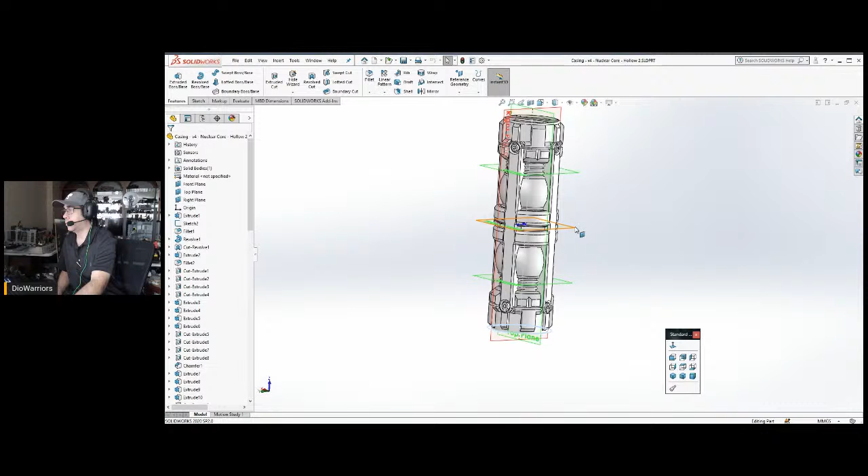There's a few other things that I am... it's been a very hectic 2 months or so since JoeFest, since coming back from JoeFest. It's been extremely hectic over here. And I'll explain a bit of some of the delays and things.

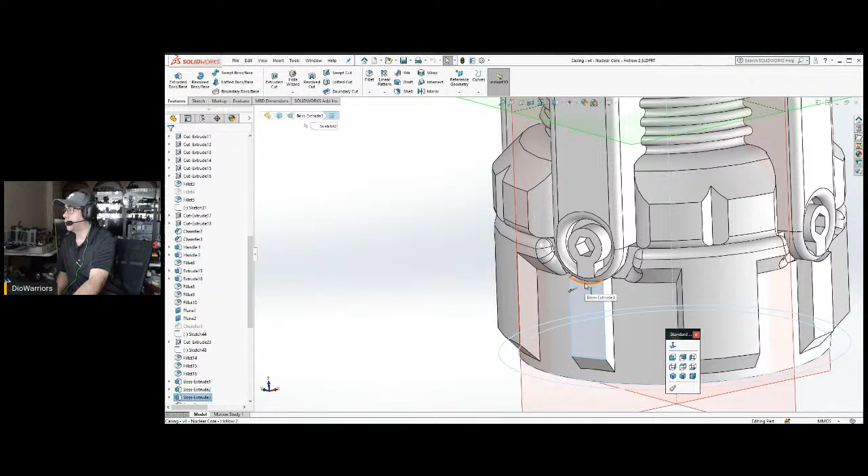So this is what I'm thinking of doing. This I'm going to make into 90 degrees. This I'm going to leave alone. This I am thinking of — I could leave it as an arc, but this I'm thinking of making more separated, you could say, maybe with a bevel.

This I'm going to eliminate the hexagon hole there because it doesn't show up on the print. I'm going to eliminate this screw part here, eliminate this gap that's in between the support structure piece, eliminate the bevel here, and basically from this point, make this into a little bump. The details of a raised screw won't show up, but it'll show up as a bump.

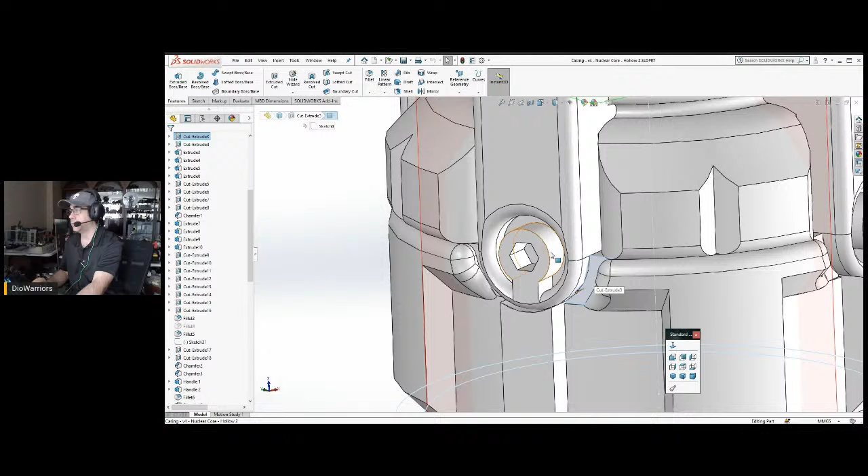Playing with the imagination, you see a surface like that and your mind is going to think, oh, little screws or something like that. What's going on is that the printer is printing this area, but there are so many raised parts and extruded cuts, little gaps, that it's rough. It plays on your imagination that there is some sort of detail there, but if you don't look at it straight on, like with a magnifying glass, mentally you see it and know there's something there. Now the details didn't really come out — just too much of a challenge for the printer.

So I'm going to help the printer by, instead of doing a lot of these cuts, making it one single bump. The concern about the smoothing process is this: these details here actually came out. I'm amazed, I wasn't expecting them to come out as well as they did. So with the resin printer and the FDM, this section actually came out.

Is it raining? It's raining outside, wow. I kept hearing this noise — with the headphones I'm thinking it's the noise from the fan or maybe one of the printers, since they have fans as well, and sometimes the fans turn on and off by themselves. But no, it's rain. Just got a message here — I'm going to take a quick look, because it might be one of you guys watching asking a question.

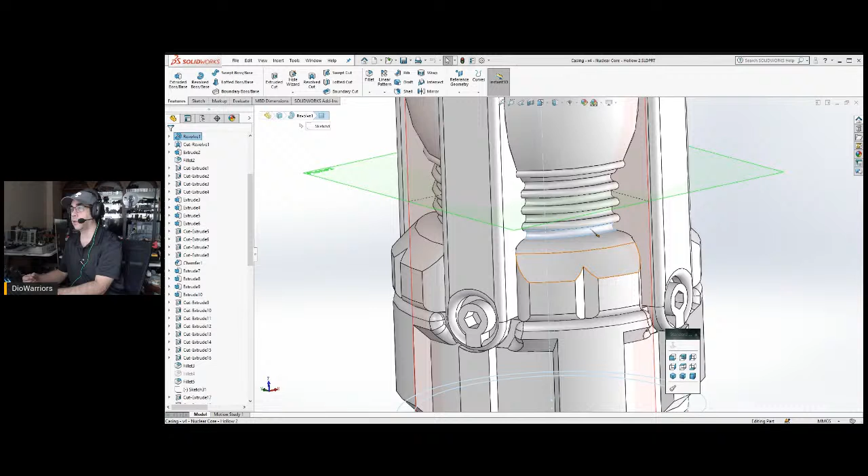Now these little dips here actually came out, but didn't come out very strongly. What I can do is either remove it or remove the bevels, making this more like a cut. I'm thinking making it more like a cut would show up that there's two parts. That definitely will — I have no doubt on that.

Yesterday, in the previous video, the concern was also this area because of the overhangs. I'm thinking what I can do is remove this middle piece, because the print does print something — it's not completely clean, but without a doubt there is something there. I would help the design by removing it and making this more of a gap. The gap definitely will show up, and it would actually look good. It actually does look good on this piece that I'm looking at.

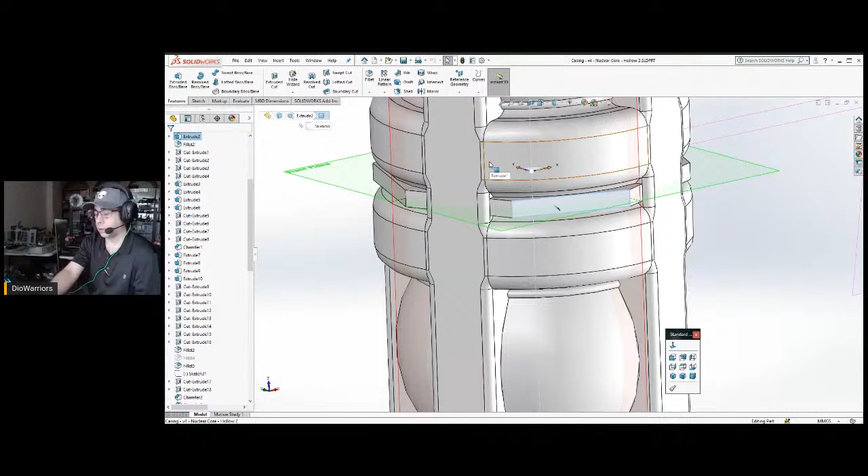So instead of just putting something at the ends, you could just rest it on top, which is also a good idea. A little bit more on the sci-fi part, making something suspended in a different way.

So okay, let us begin. Am I in the proper folder for it? I am not. I am going to go ahead and file, save as. I'm going to make a separate file. Let me go ahead and copy this path. I'm going to say 2A.

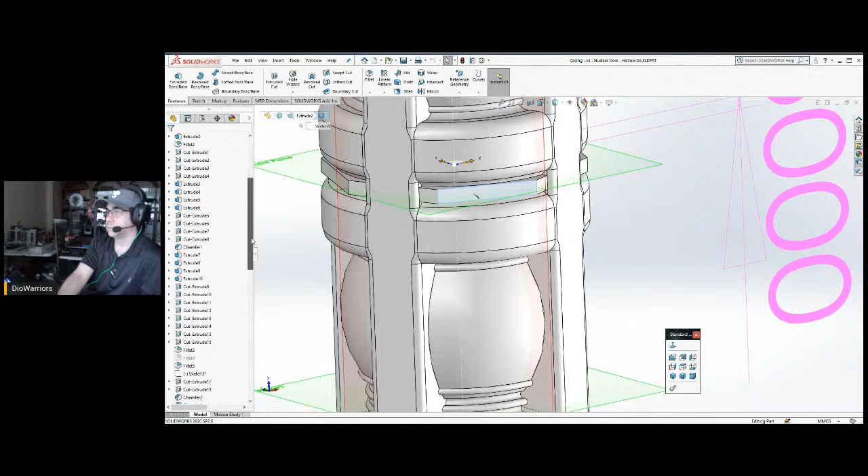That way, these changes are going to be significant enough that if I want to go back and fix them or do something else, I have the master file that I can revert to. Okay, so there's no errors listed on the top, so we shall begin.

Can I simply, with this one, simply select the shape and delete it? What exactly is this shape? All it is, is a hexagon.

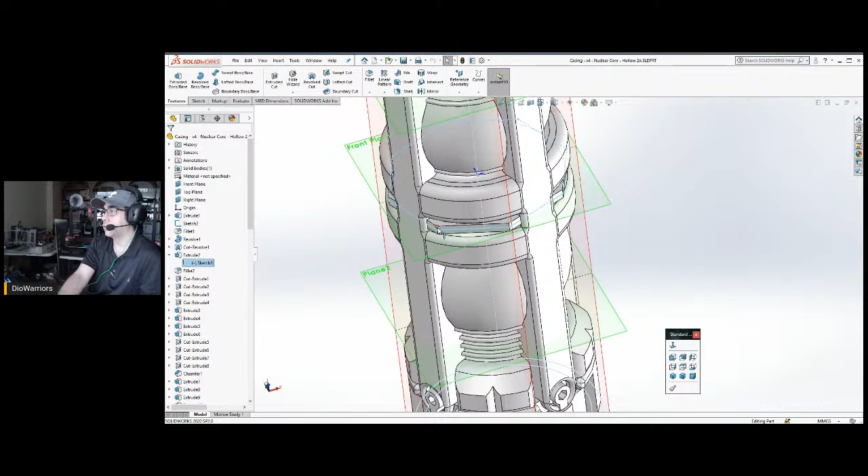Another option would be to simply make this shape smaller, give it a smaller diameter. That way it's still there, just smaller, so it doesn't really show up. Let me try that real fast.

Okay, so I'm going to click Edit Sketch. Working from here, what do we want to do? Do we want to just change the diameter size? Let me just go directly, say 3 millimeters. That would make the thing basically disappear.

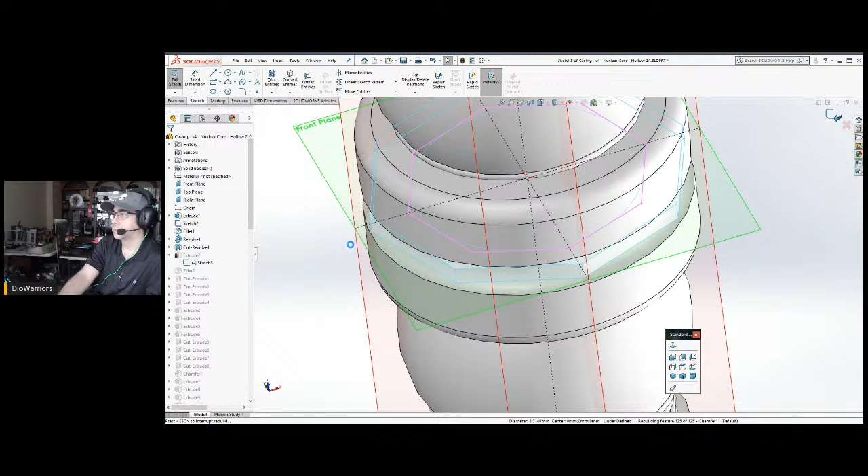Let's try this, let's see if there's no chain reaction. There might be, yeah, look at that, a bunch of errors there. Are these significant errors? I mean, yeah, well, there's quite a bit.

So let's undo this and simply delete it. Control Z. One Control Z should have done it. I'm going to go ahead and just reload the file. Oh okay, we're back.

Okay, so let's take this then and delete it. Yes, it will come up with errors, but the errors may be less. It might be even easier to fix. Sometimes it's harder to fix an error when parts are linked to it, the same kind of errors.

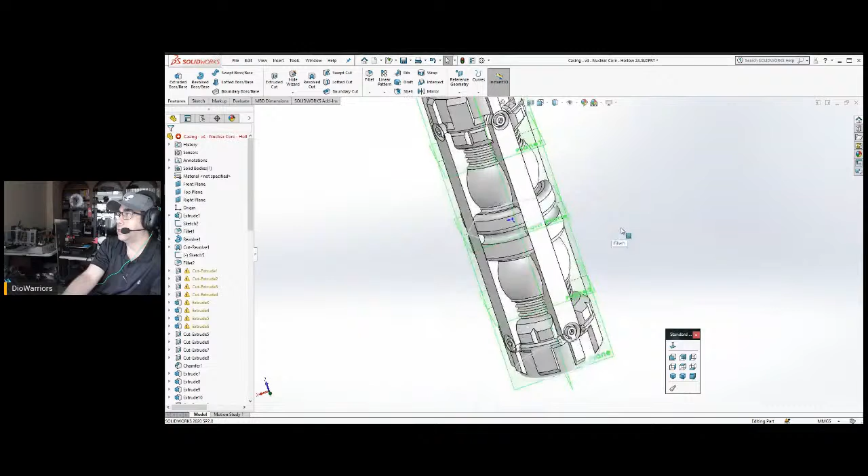Okay, well let's take a look and see. Could not find face or plane. That's a lot of stuff. Well okay, see, I don't want to spend too much time going back and fixing. So let's Control Z again.

Let's do this, not the best way to do it, but let's go ahead and just simply put another part on top of it and delete it that way by cutting it away. Okay, so this is what I'll do.

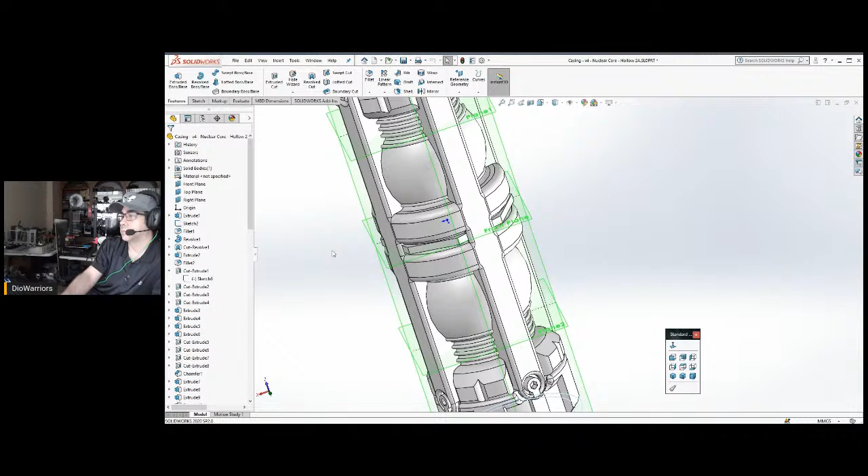I'll select this plane right there. I'm going to go sketch. Now I'm going to select that surface there. Let's do a cutaway.

Let's cut this away so we can see. Come on, cut away. Come on, I want the cuts finer. See, this is a bit not fine enough. I need to, how do I do this?

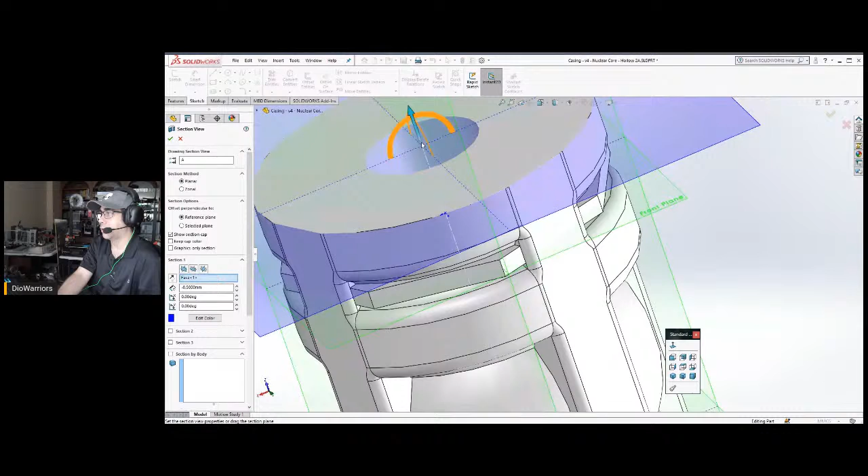Offset distance. 0.2, I never messed around with this before. 0.5, let's try that, I never did this before. Never did that. Can I simply drag this here? Well, still want to do 0.25. 1 point. Yeah, so this is doing what exactly? Positive there, negative.

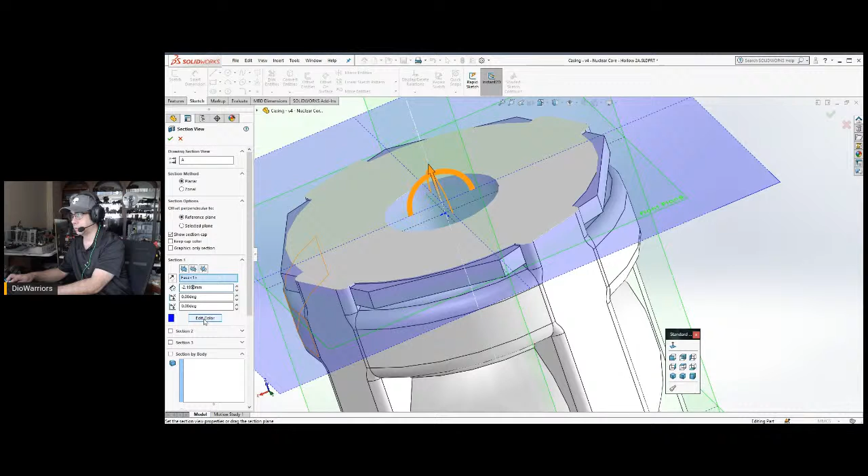Okay, much... that more. A little bit more, getting closer to the 2 mark. Oh okay, let's just leave it like that.

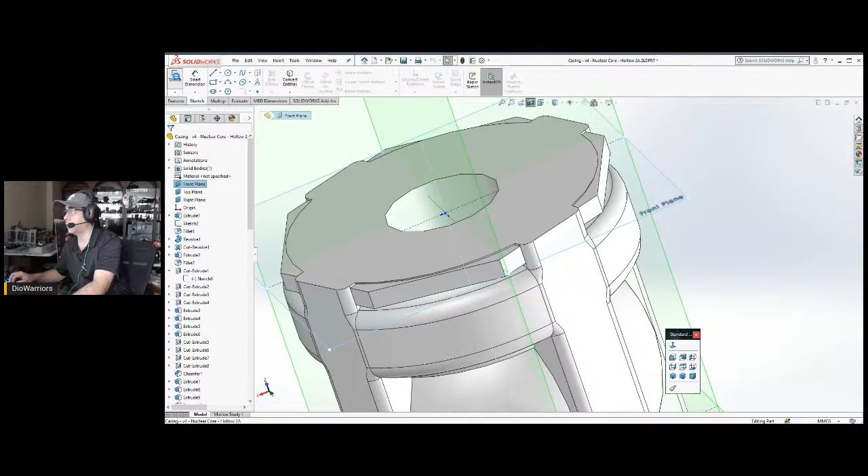Okay, so what I want is to expose this area so I could go. I already went sketch. Maybe I didn't select the second sketch. Okay, so this, I need to change the orientation.

What I'm going to do is make an outline here. There. Okay, up. Delete. Here, here.

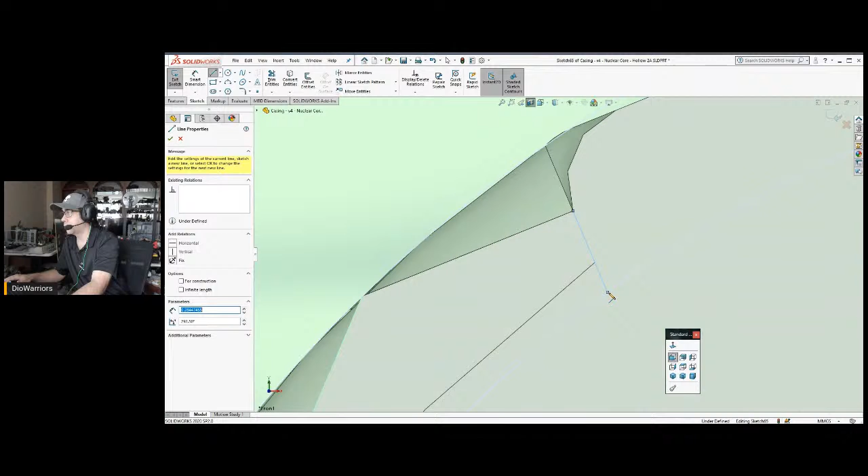I guess there, because remember I didn't really cut away in that view all the way down to the surface. I just got really close.

Let's do this, go center line. Find the center line from this thing. Where is it? Where is it? Where is it? There it is. Okay, center line, let's go put here. So what I want to do is select those two and say mirror about this line here. Okay, now I have it down there.

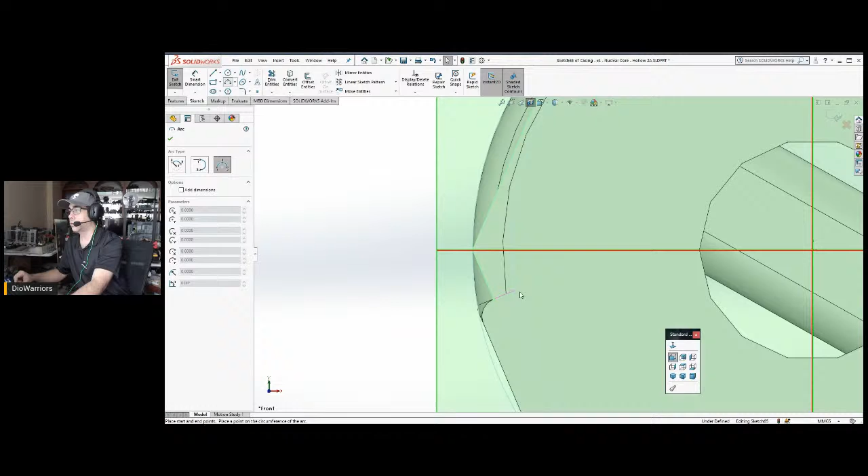I say good, now let's do an arch, or an arc. I keep saying arch instead of arc. Okay, it looks to be like the underlying circle that's underneath it. Now I'm going to select this. Rotate, no not rotate, sorry. Now I'm going to select this.

I'm going to say circular sketch. 1, 2, 3, 4, 5. Okay, 4, so total of 5. I don't have to do anything. I just select it, say OK.

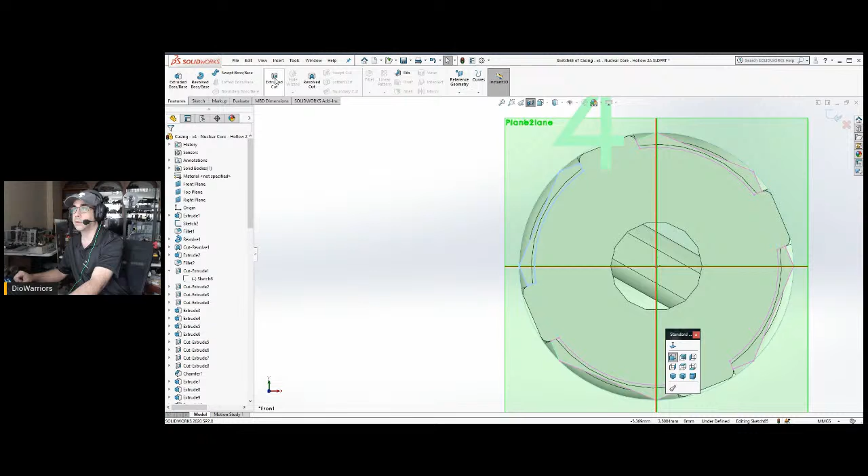Then I could go features, extruded cut. I just want to go from up to the surface. I want to do the cut to that surface. And on the other side, direction 2, up to the surface here.

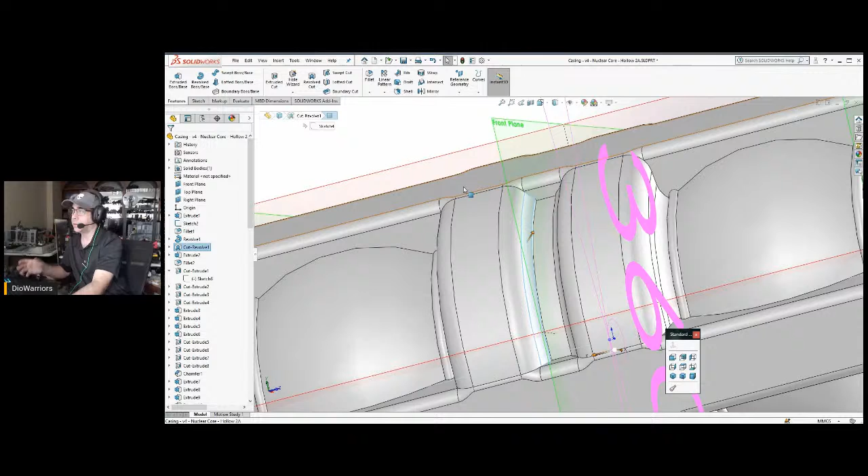Now there's a little piece there I'm not going to worry about so much at the moment. Let's remove this. And because what I want to do here, this might generate an error because maybe I should have done this part first, but because we were doing, well, let's see.

Oh, it's a Revolve Cut. Ah, look at that. Okay, where's the master shape? It's right there. Huh, I can probably make this a little bit bigger. Let's see. Sketch.

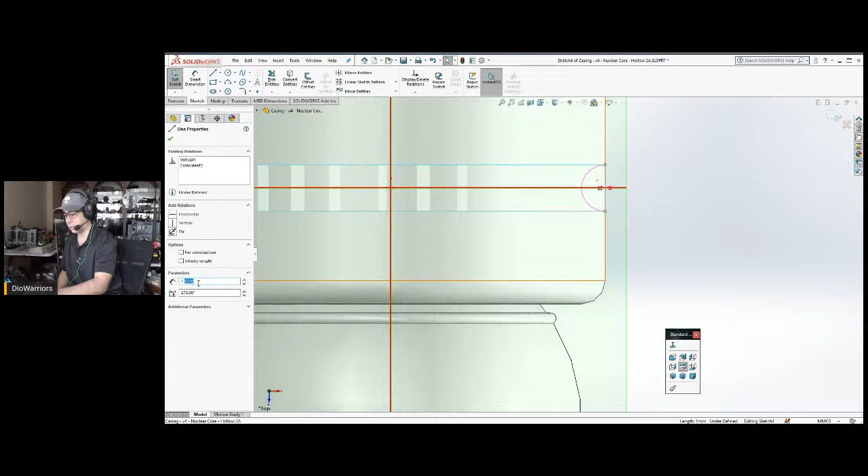One, so say 1. Can I say 1.25? But is it going to do it in the center or is it going to do at one end? I did it at one end. Maybe I can take this and drag it.

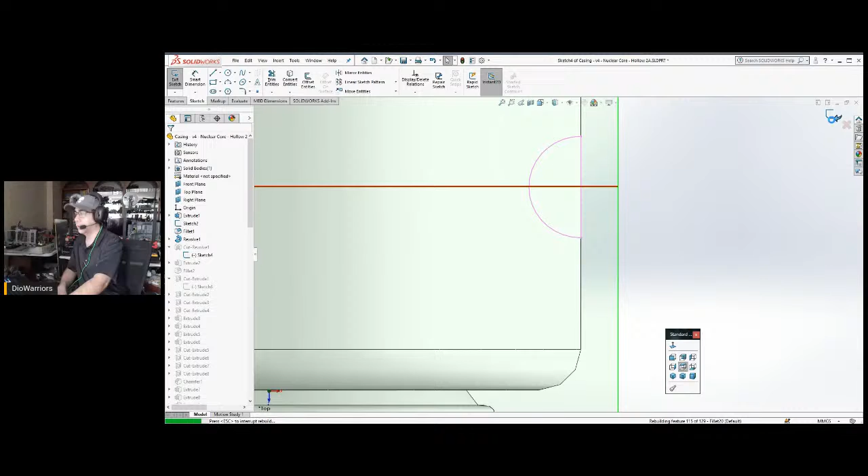Okay. I hope that's dead centered. Okay, let's select it and see what damage we've caused. I don't see any errors, so okay, it took it.

Now I see this extra band, but I think I'm going to ignore this band part here because, well, what if I were to print this on an FDM printer? I mean on an SLA, on a resin printer, sorry.

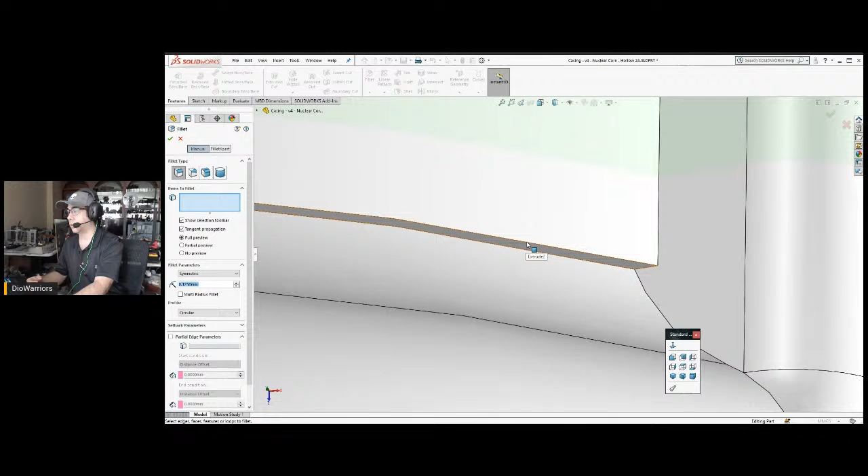0.125. Well, if that's the case, let's just add a little bit. I don't want to do the face. Let's just add a little bit of... come on, select it. There it goes. Okay.

Actually, let's do, yeah, we could do a face. We could do this face. No, didn't like it. Okay, let's do it old-fashioned way. Let's go piece by piece.

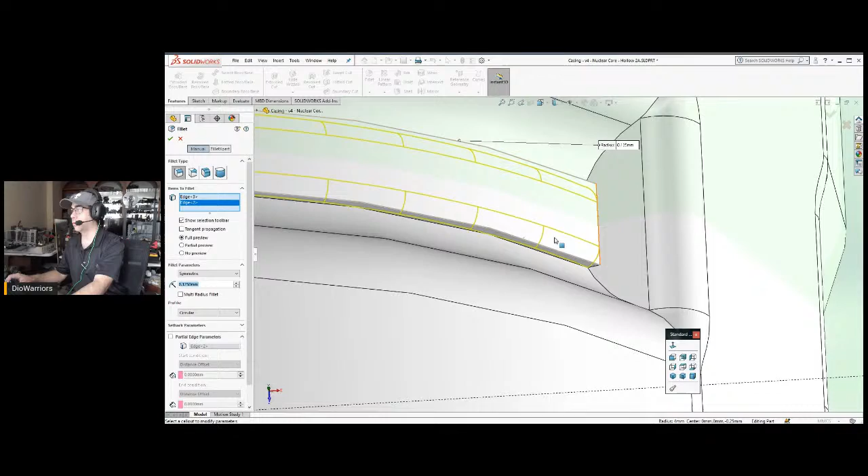This one, that, rotate, this, that, rotate, this, that, rotate, this, that. Okay, done. So this should print really nice, this section here. Okay.

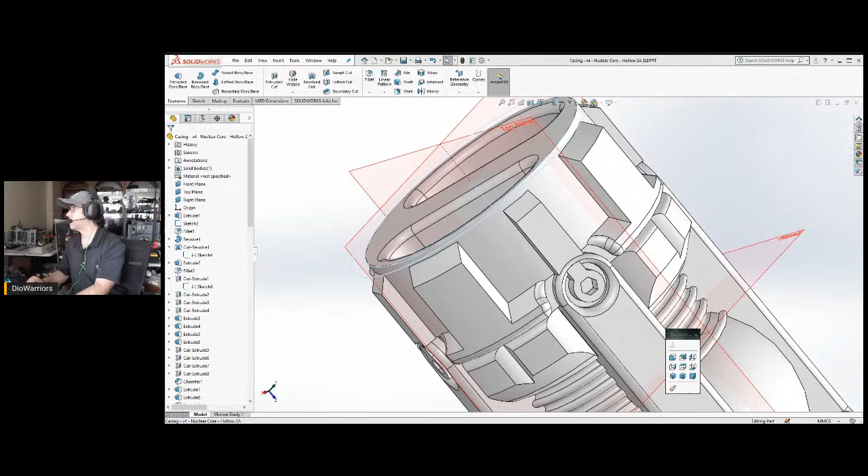Let's see. Now, what I'm going to do is, come on, just rotate this around. Okay, now I'm going to go to this. Let's see. Did I do both sides on top and bottom? Select this and see. Yeah, okay. So, edit feature.

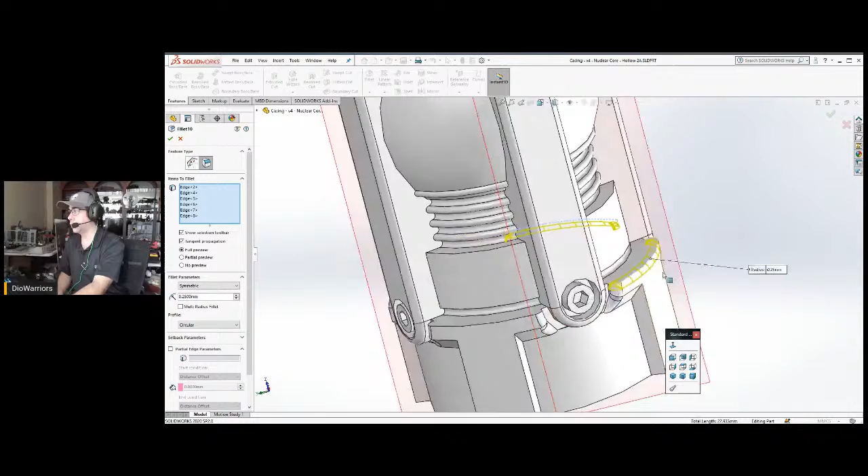Remember, on some of this stuff, there might be references on other sketches where the sketch touches the fillet surface here. And since we're removing this surface now, this option on half of it may generate a warning, errors, in other words.

So, okay, and see what damage. Yep, look at that. A common corner of the selected face's edges is too complex. Try to fillet one face edge at a time. Let's just do it.

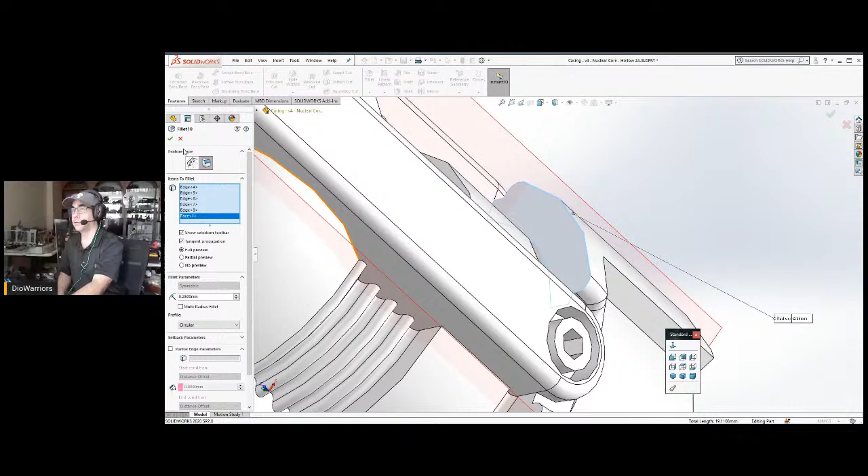If not, I'll go ahead and just delete this. Let's go ahead and delete it and remake those areas. So fillet 10, huh? Okay, delete. Yes.

Watch a chain reaction. Okay, it did pretty much what I wanted. Pretty much. There's the dividing line that existed here from this point to this point, it's not there anymore. But that's okay, that's okay.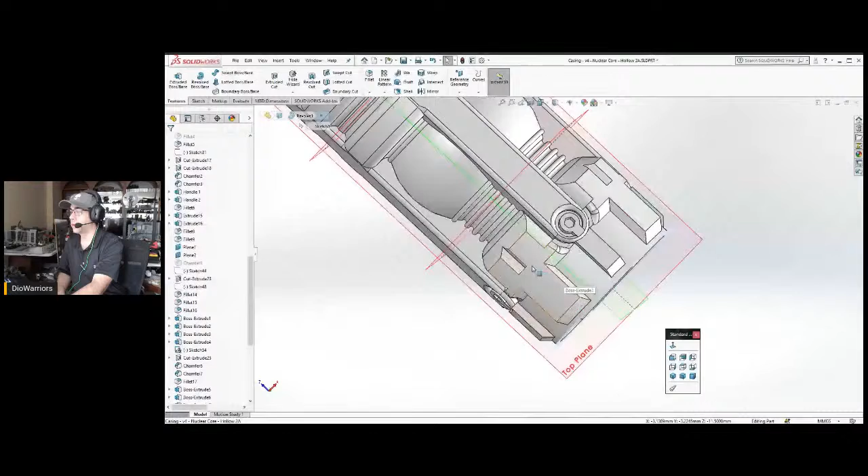Let's see, maybe we don't need it. I don't know. Let's see how this looks without it. Yeah, we don't need it. Actually, this might look better this way. Sometimes good things happen from an unintended consequence.

So let's see about removing. Okay, what did I? Oh, this was actually not a beveled area. It was actually sketched that way. So let's see.

Ooh, look at that, errors. Where did this error come from? I don't know. When it's errors like this, usually it's going to be hard to find because sometimes it's unmarked. You don't know where, or without loading this file again, it's going to be really hard to find where those errors were.

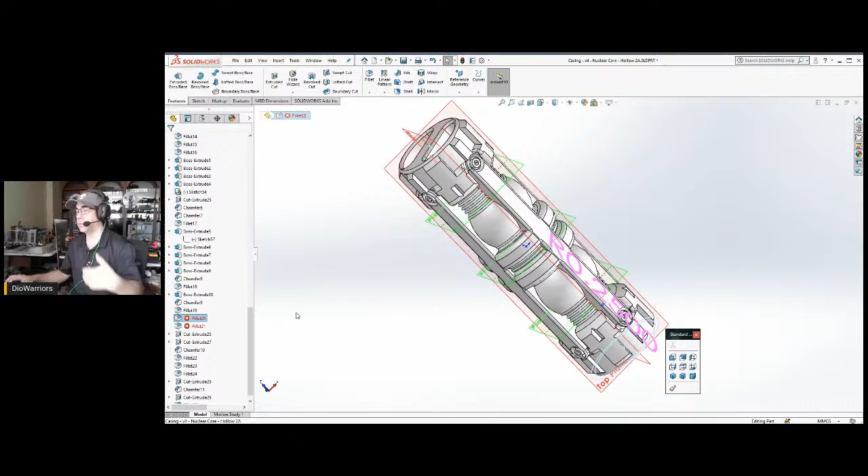Remember, we have a master file that I saved. I can load that up and take a look. But as I'm talking, I'm also thinking that these are the leftover beveled areas of the cut that I just deleted.

So, actually, it wasn't a cut I just deleted. It was a bevel that I deleted. But let's just delete this, remake it.

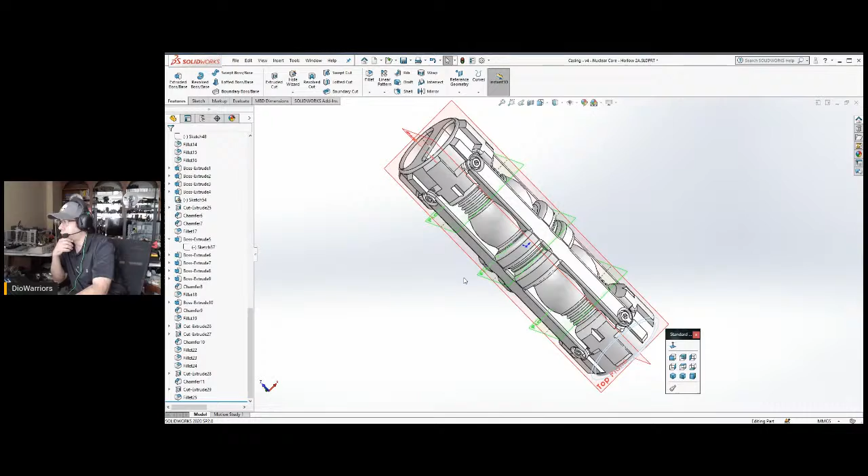It could also, but remember, like I said too, there's references, and so maybe that was a reference that no longer exists now. So now here's something. Do I need to have this part here? Can this just go straight across and cut away like that?

Anyway, let's stay on target. So I'm going to go ahead and save this. But always save your work often. You never know when a crash is going to occur.

So far, SOLIDWORKS 2020 has been very good for me. Very stable. I have not really experienced many crashes. I've come across a few.

But when was my last crash? Before Joe Fest, and that's like more than 2 months ago, because it didn't crash right at Joe Fest. It crashed somewhere earlier in the year, probably twice, but I really don't remember. Maybe 3 times since the beginning of the year, but it hasn't crashed in a long time, so that's good.

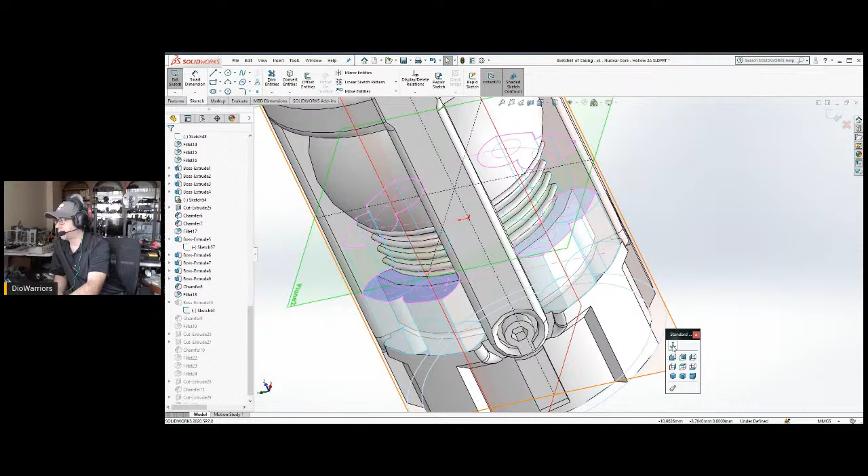So let's take a quick look at the sketch. Sketch looks like that. Let's alter the sketch. So that's how that's going to look. Let's do the cutaway thing again.

Now let's just deal with, put it back to the settings it had before. Minus 2. Okay, I'm gonna go right up to about here.

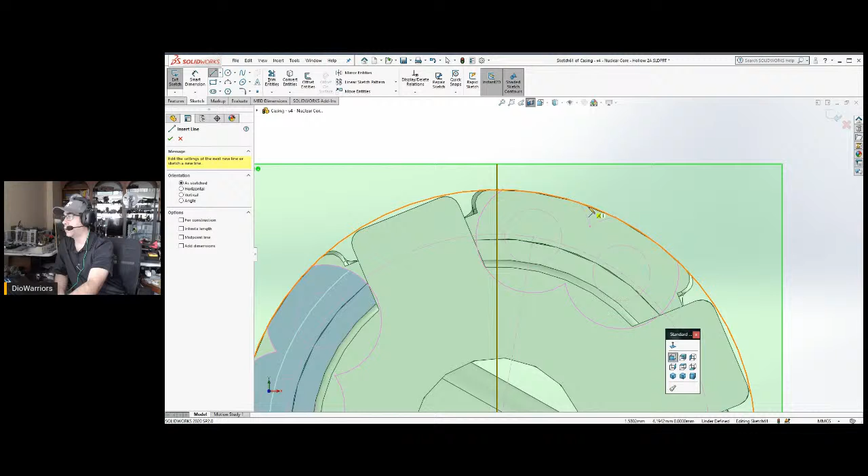So let's just take this one. Let's make this into construction. Let's just make this, okay, well first of all this is probably from the middle, from here to here. Ah okay, look at that. So okay, let's just go ahead and do this. Let's go ahead and make a line going from here.

Point 0.5 is a good one. But now on these printers, a separation of 0.5 millimeter, these printers can easily handle it. Want to make it a little bit finer? Let's try, see, now if I could do this, okay, that this would work if I do a 1/4 millimeter, 0.25. That would also work.

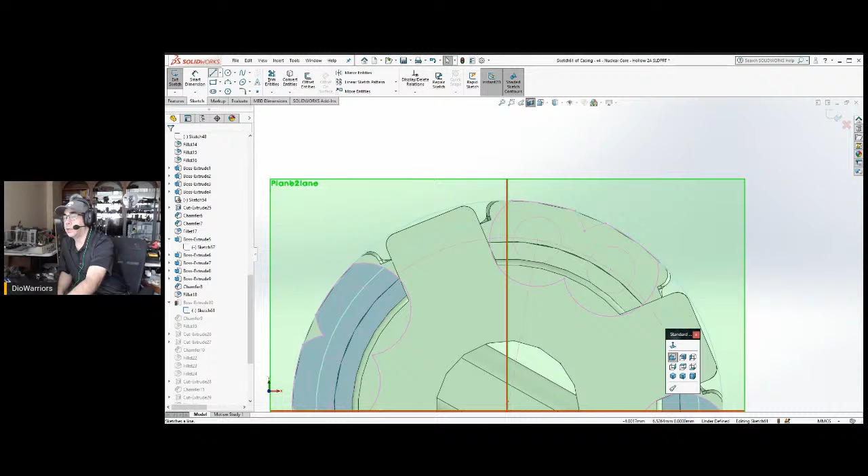I'm talking about how deep the cut is going to be. Well, 0.5 millimeter is usually my standard, so let's go ahead and just make this 0.5 millimeter deep. The program is helping by already determining straight towards the origin here. If I were to continue that, it looks like it would from there go straight down somewhere towards there. So the program is being helpful by going to the origin.

Selecting a circle here. Yeah, that's good right there. So what I'm going to do is trim that circle. Okay, now I can delete the rest of that circle. Now I can trim this line. Oh, now I can delete the rest of that line. I just need to trim it away, basically break that line.

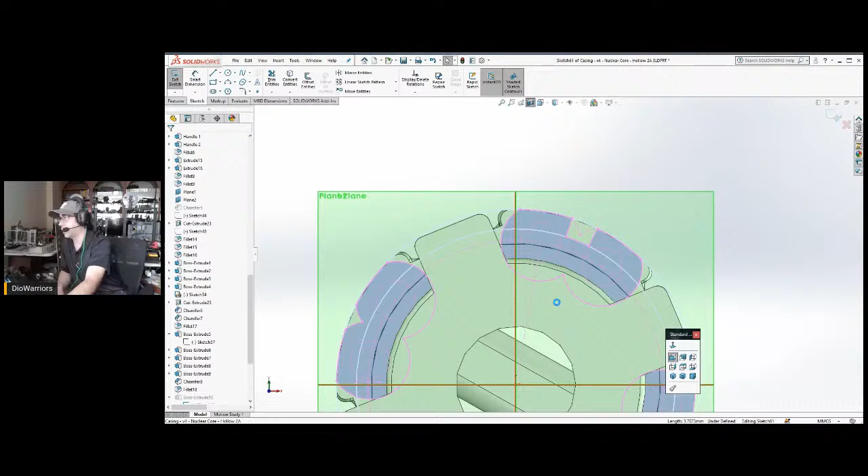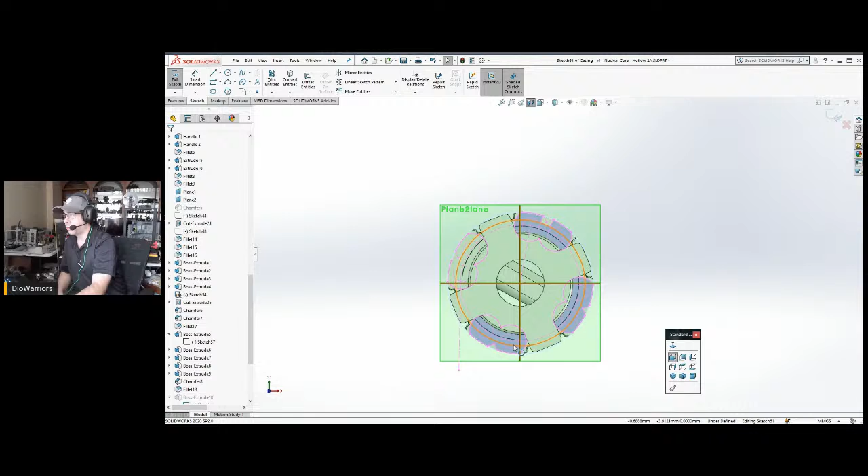Now what I'm going to do is, I don't want to mess around with how other sketches have references. So what I'm going to do, if this was a fresh drawing, a fresh sketch, I would eliminate all of these other sketches, and I would make a circular array of this all around. But I know it's going to have references to this sketch, so when I click OK up here, it's going to say there were errors not found anymore, basically I broke the reference. So what I'm trying to do here is preserve the references by going about this in a roundabout way, not interfering with as much of these sketches as I can.

And changing these to construction, so that way I don't mess around with this sketch, that sketch, this sketch, that sketch. So any references to those should be preserved.

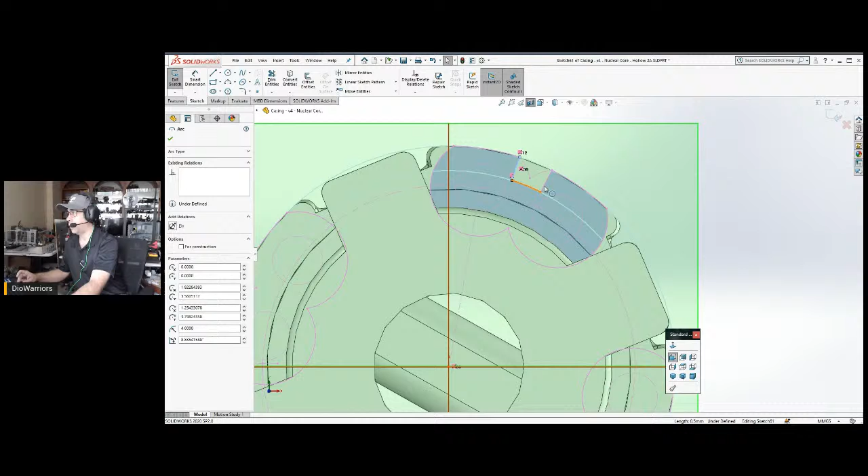Now, since these are now construction lines and the program will ignore construction lines, what I intend to do is select the new stuff that I just did and make a circular array. The only concern is on the new items, will these points here at the corners actually touch and meet? Sometimes what happens is you'll insert the array, you have a part you removed, in this case a construction line, and then you put another part inside. But the program, when you zoom it in, shows whether that's actually touching. So if we get any warning messages, I bet it'll be for that.

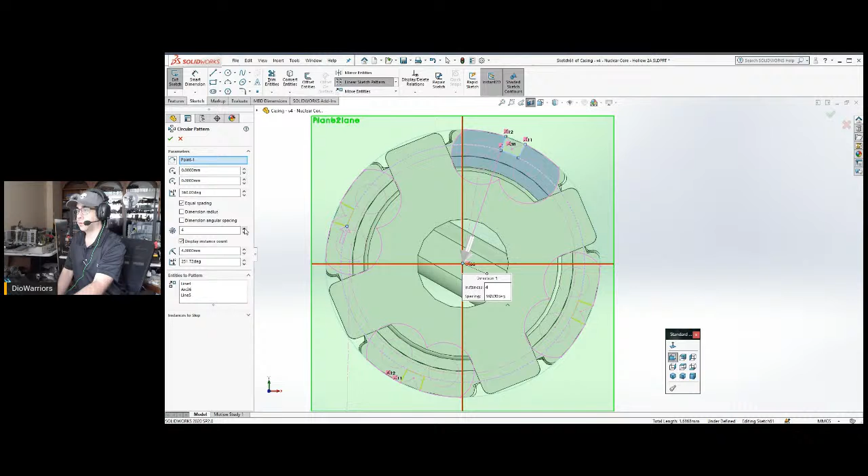But we'll see if it actually joined the lines or not. So those are selected, I will go circular sketch. So 1, 2, 3. Yep. Total of 4. We can play around with this, so that just makes changes. Okay, so there, let's go OK. Now here's the moment of truth.

Ah, it did it, no errors. Okay, so what I do now is get out of that cutaway view and do the same thing to this side here.

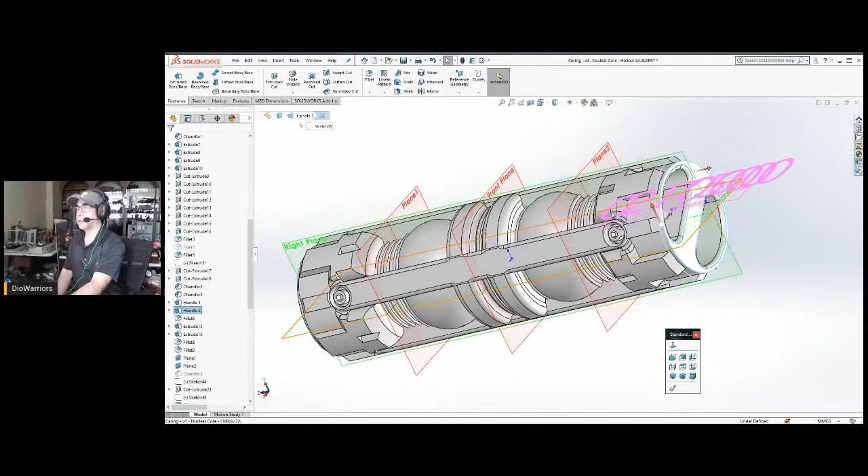Now I didn't cut and paste, so let's do this. Since we know what we're doing, I'm going to find this sketch, right there, and do it real fast.

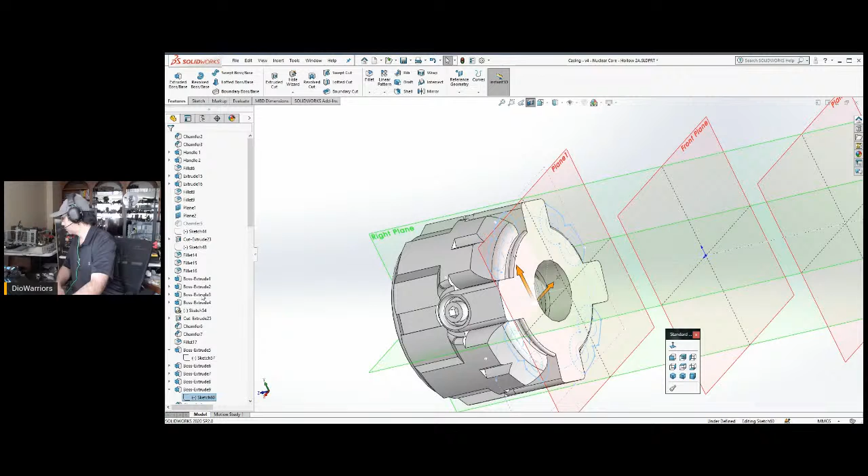I don't know who this person is. I never answer calls that I don't know the number. So if you ever want to call me, send a message to me first, giving me a heads up that you're calling, and then I will answer.

So, okay, let's do this one. I'm currently in sketch mode. Okay, got a line. I guess we just go straight to here, there, and here. Okay.

Actually, I forgot, I want to make this just 0.5 millimeter deep. So I could say 0.5. Aha, good. Okay, now I will do the same approach.

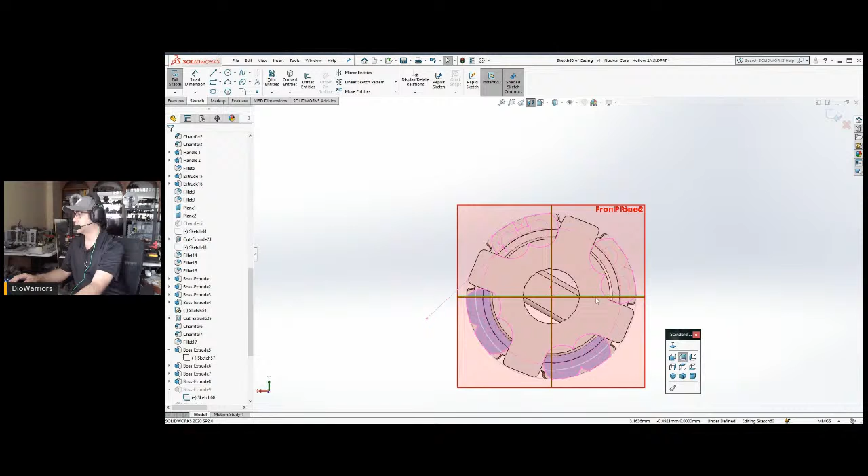Ooh, and you know something, I now need to go back and make all of these construction lines. Construction lines, construction lines.

So there's other little topics that I can talk about right now. Maybe I should just do a broadcast where I'm just talking about these other topics rather than in the CAD thing, since not everyone is interested in the CAD parts that I do. You know, they're interested in the results.

No, I'm just looking at these spots here. Anyway, there's a lot of little areas in this design. It has me thinking, as this design kind of evolved originally, it has me thinking now, oh well, maybe I should go in and make an update, from fresh. Well, there's something to do, but...

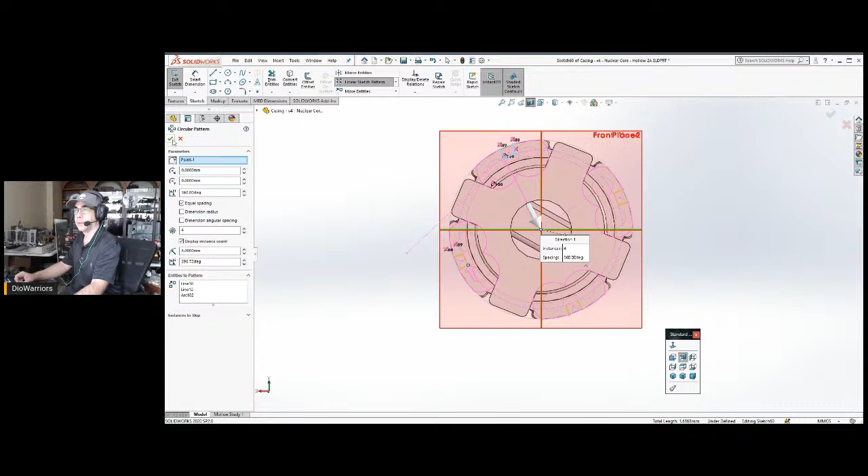Let's see, select these items I just did. Now I'm going to deselect the construction lines. 1, 2, come on computer, catch up. There it goes. And I will do a circular sketch pattern. 1, 2, 3. Okay good, now I'm going to say okay.

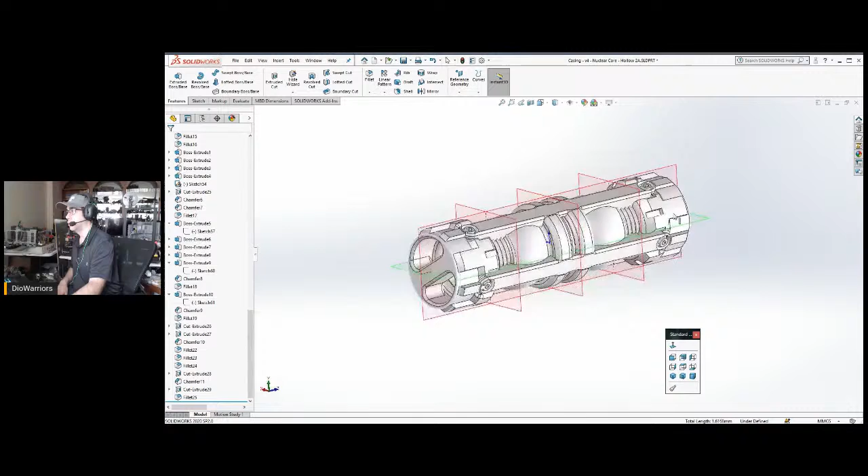Go up and see, good, thank you. No errors at all, thank God. Okay good, so now I'm going to remove the cutaway view and take a look. Okay, save. Now let's see other little things.

Okay, let's go ahead and make this into a flat edge right here. 0.25, do I want to go 0.25? Okay yeah, that will show up because this is 0.25 and this one I believe is also 0.25, so total is 0.5. So 0.5 will show up pretty nice on these machines.

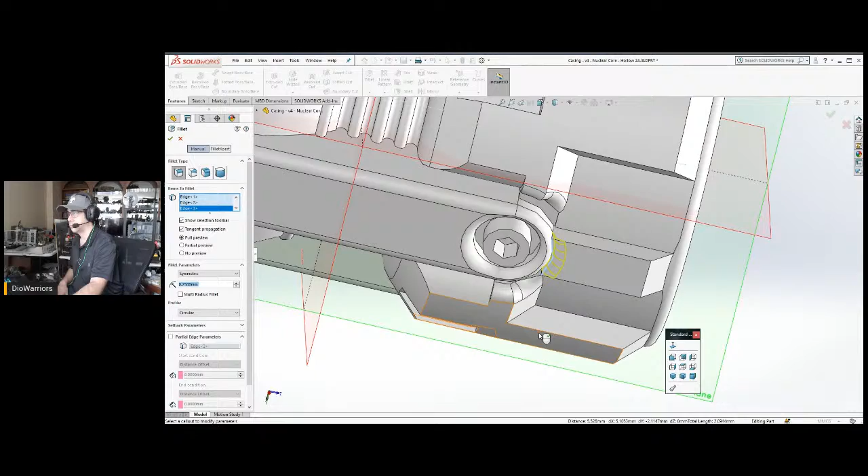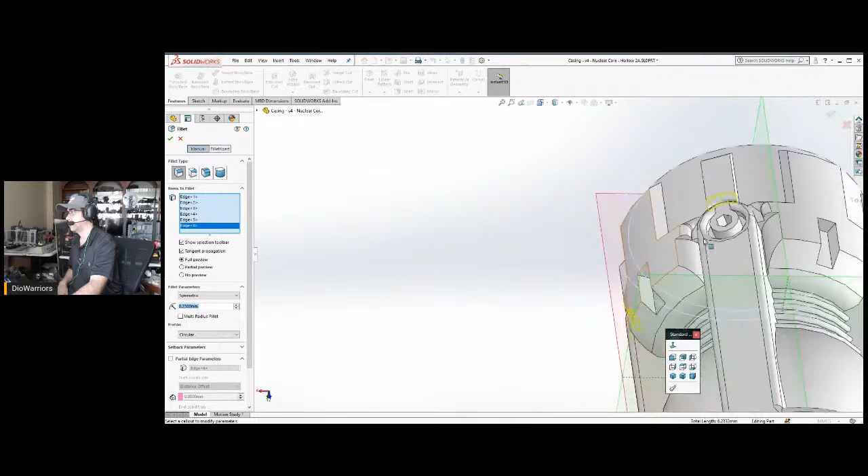Okay, now for consistency, let's do the top. Okay, so done. Now let's save this.

So what else can you do with a nuclear core like this, a power core? Could definitely make other props. What if I did an attachment for the top and bottom where you can attach cables to it? Interesting, I think I will try that.

Yeah, see, looking at this, I come up with other ideas. One reason why I do want to do these nuclear cores as a standalone prop and done in plastic instead of resin is future designs. For example, sitting on a desk, it gets kind of boring just laid on a desktop. Now wouldn't it be nice if there was a computer display connected to it? Maybe some sort of keyboard and something on either side, left and right, suspending this off of the tabletop.

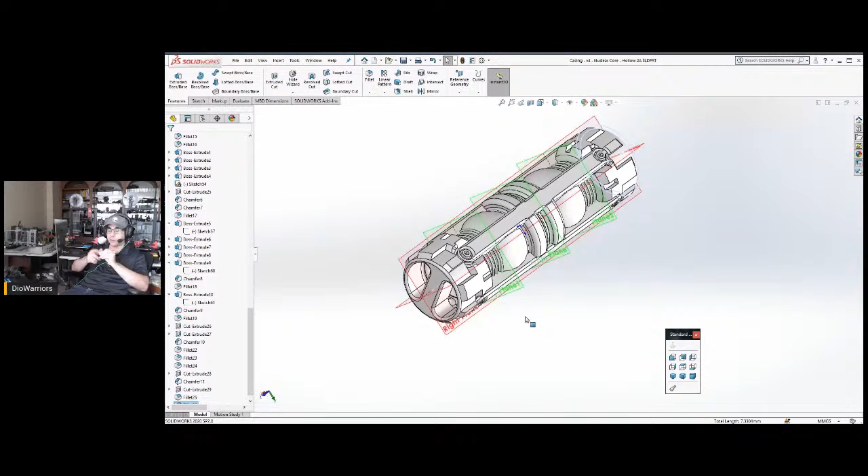And if you could do that, well, how about connecting other kinds of machinery around there, instrumentations. That might actually look good. Maybe I could do something like that and send this off as a freebie to the person who's been waiting patiently for it. But we'll see if I could do one real fast. Let's see, because I want to send this out tomorrow or the weekend.

No, Friday or Saturday. So okay, the next step to do is let's eliminate these Allen screws here. Okay, so I'm just going to go ahead and just delete it. Delete. Okay, no errors, good, good, good.

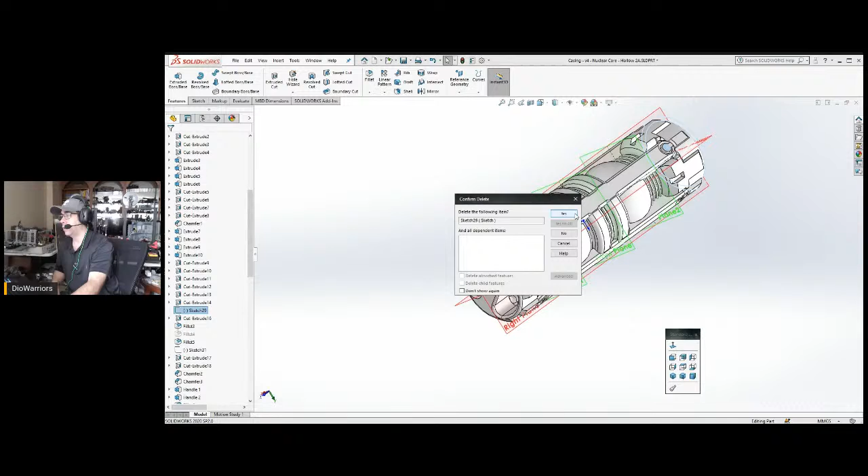So I'm going to delete this also. Delete. See, deleting comes in, unless you specify otherwise, two modes: delete the 3D, then delete the sketch. And so I'm going to go around and do that for all of these Allen screws, these Torx screws, or what's the correct term, these cap screws, these stem bolts.

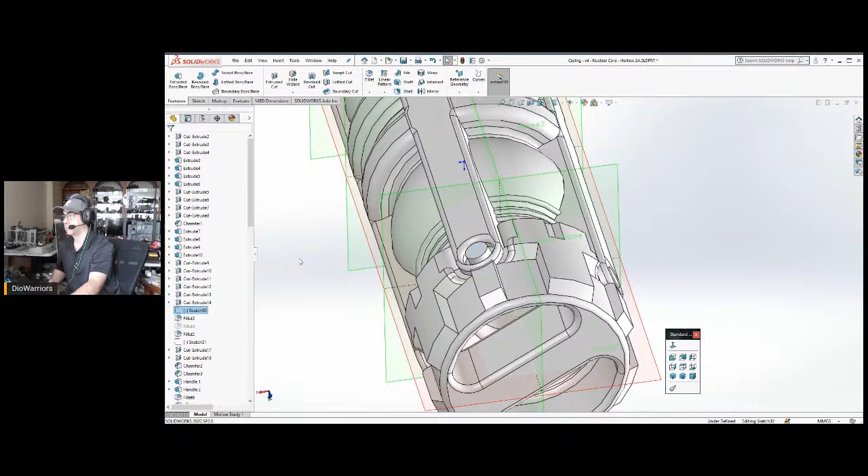What happened there? Look at that. Did I delete the right thing? Maybe not, maybe I deleted the wrong thing. Oh, maybe I'm on the sketch? I don't know.

Okay, maybe I just... oh, you know what I did? I keep going into sketch. That's what happens, I don't do a lot of deleting, so I do more like, let's edit the sketch. So subconsciously, without thinking, I'm editing the sketch.

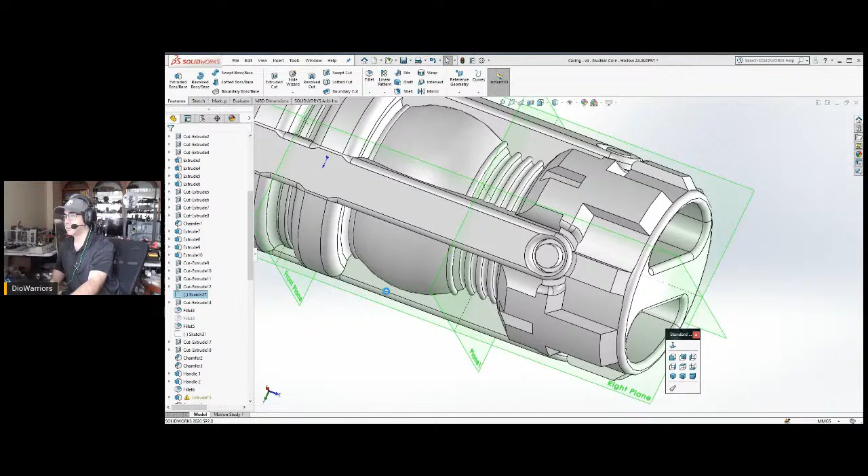There's one warning. Delete. You see, I was going back up to edit the sketch again. Delete. Okay, and one more. Delete.

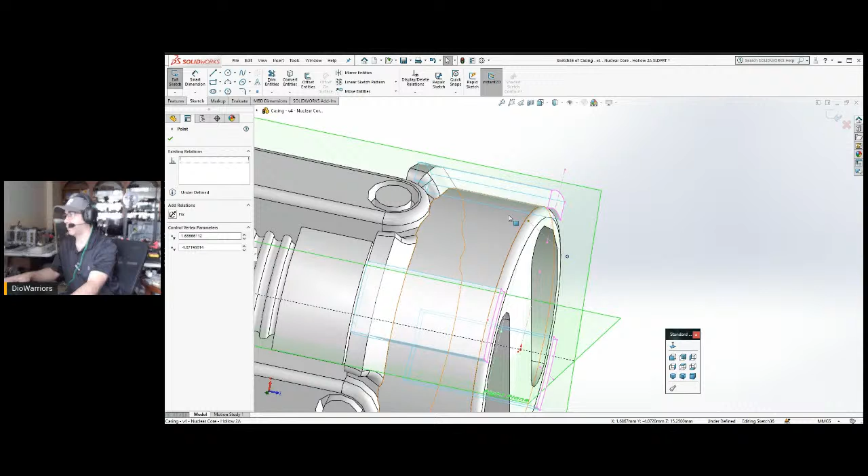Now let's see, before I continue, what's this error all about? Is it like yesterday's, where it couldn't find a face or plane, or maybe just references to these things here. This might be easy to remedy. When in doubt, delete. Actually, it highlights in this ugly color the trouble spot sometimes. In this case, it's these points there that I deleted were making a reference to something that no longer exists.

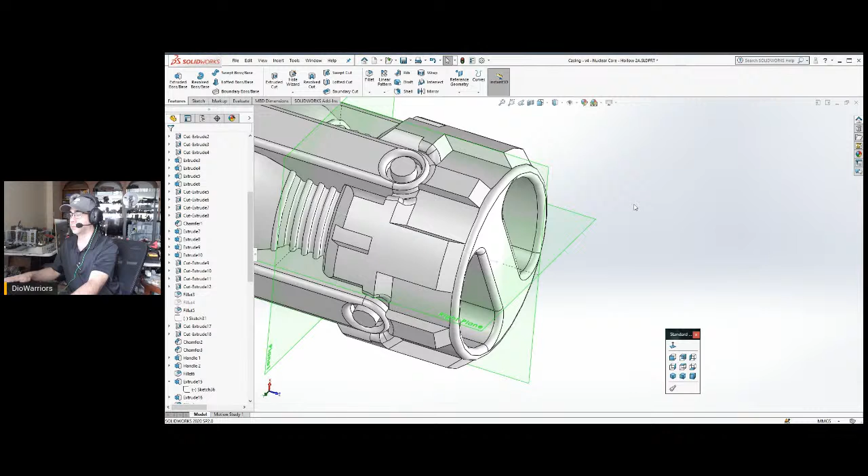Okay, what I want to do, let's save this again. Now what I want to do here is begin to remove these. Actually, I don't want to remove that, I want to remove the spacing. So that looks like I gotta do it 4 times for each side. So delete. Yeah.

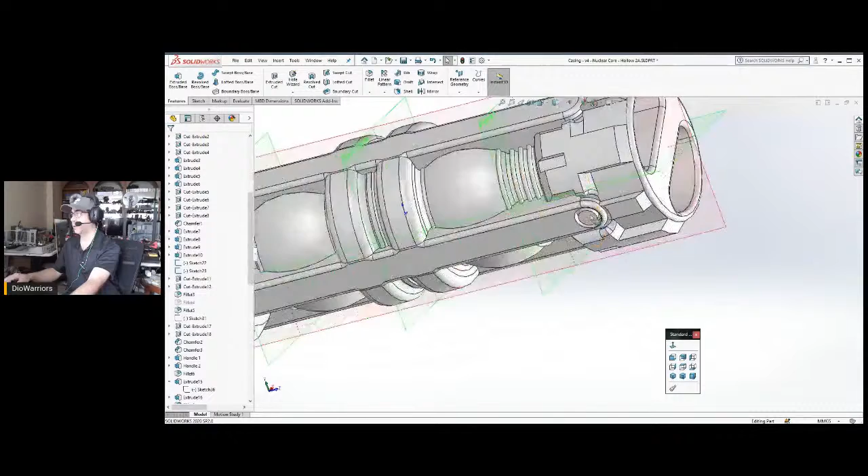I'm going to leave the sketch of this alone because I'll use it for my own reference. So this one, delete also. Yes. Okay. Now this one also delete. Yes. And this one also delete.

Now let's see, I bet you there's an error. Yeah, there's a warning somewhere. Okay, these, let's go ahead and delete these.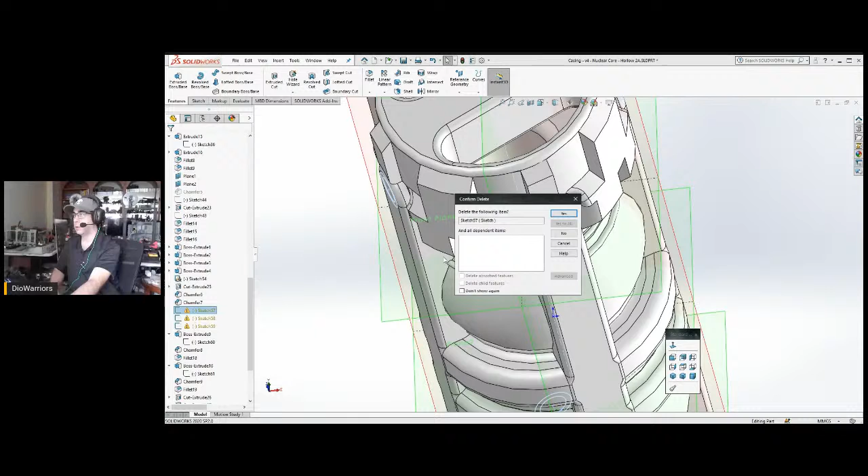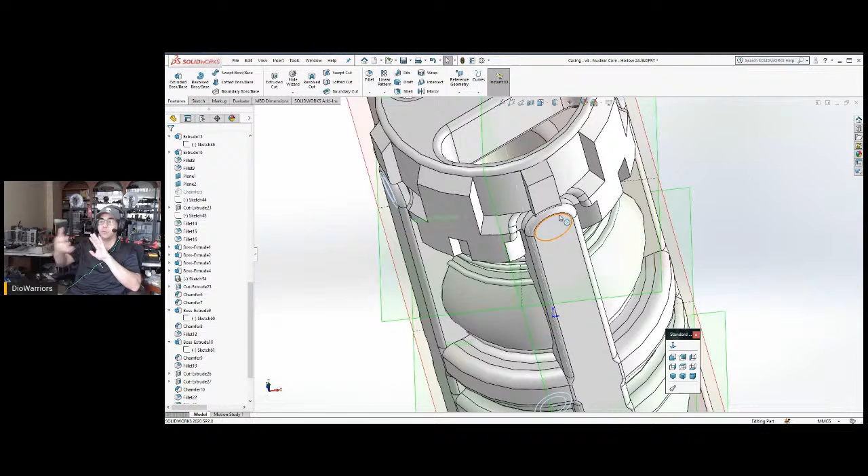This is in reference to support structure of the Allen screw that was done on the first day of this video series. Since deleting the extruded cuts that I just did, well, these support structures no longer have references. Because remember, I put basically a rectangle and then extruded it as deep as those cuts were. Well, remove the cuts, so they're just hanging sketches, broken sketches. So, okay, save this again.

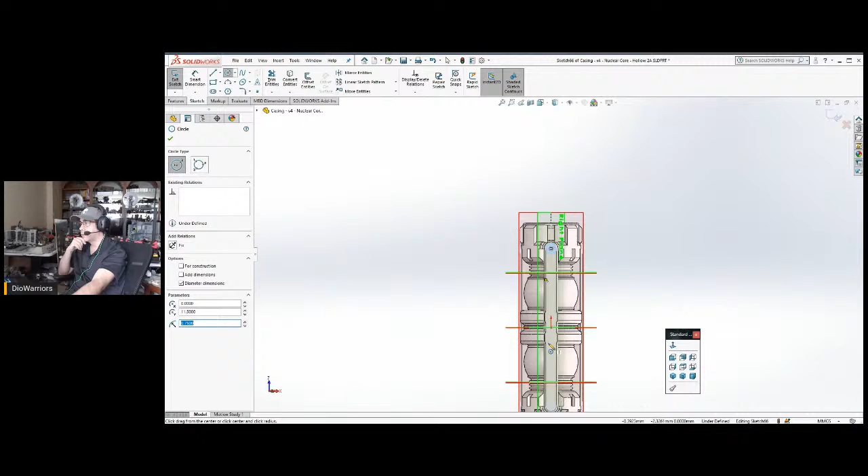Now, what we'll do with those reference circles is I'm going to just make the bump part right there. So I'm just going to select any particular side, and I'm just going to say sketch, and then just make a circle here from this point. Let's just make it right about there. 0.75. Okay, the printer should be able to handle this. There to here. Oh, come on. Zoom in more, I use the mouse wheel to zoom in and out.

So now I'm going to go features. I'm going to make this 0.5, that might be even 0.25 would come out okay, but let's go 0.5. 0.5. Boom, so half a millimeter tall.

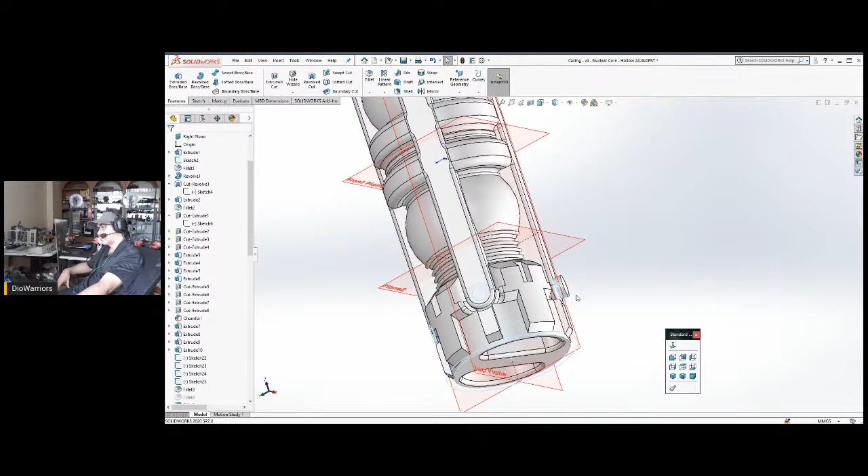Okay. Maybe it's too tall. See, I was thinking of doing a bevel around it, basically making this into a dome. Yeah, we could play with it, but let's do the other sides first.

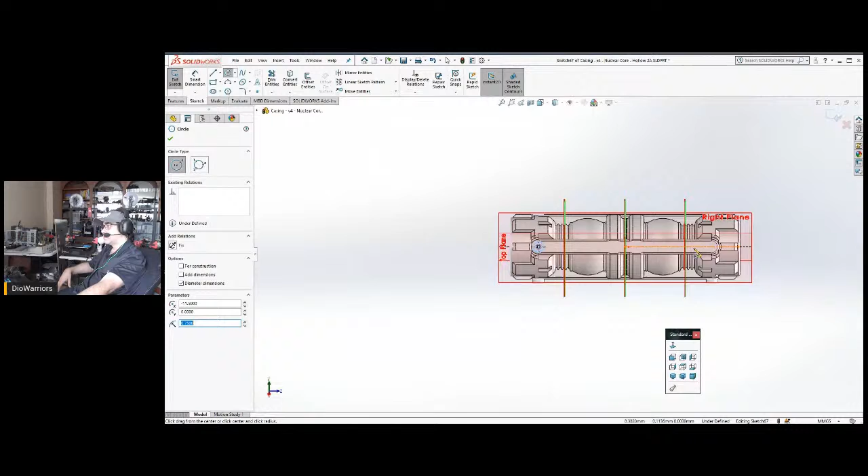So sketch, sketch, one sketch. There. This to here. Okay. This to here. Features, extruded boss. 0.5, enter. And then just okay, so now move to the next.

This. There's sketch. Okay. Here to here. Features, extrude. Good, right there. And one more.

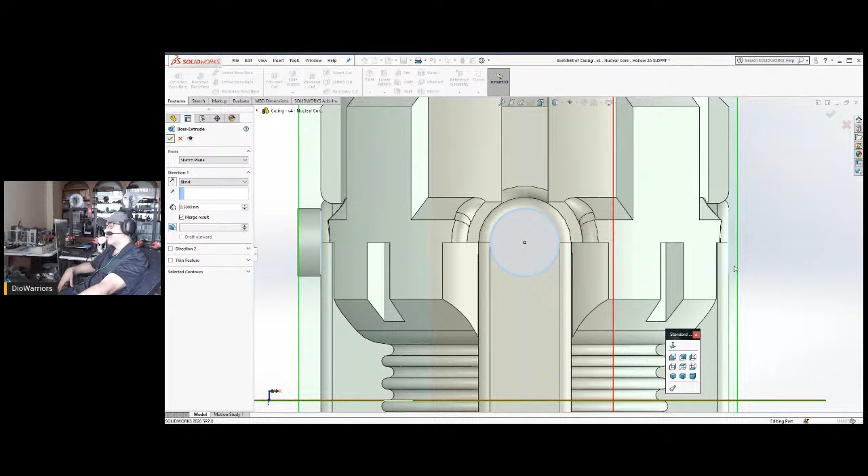Okay, this. Sketch. Okay, there, that point to there. And all the way down to here. And features, extrude. And good.

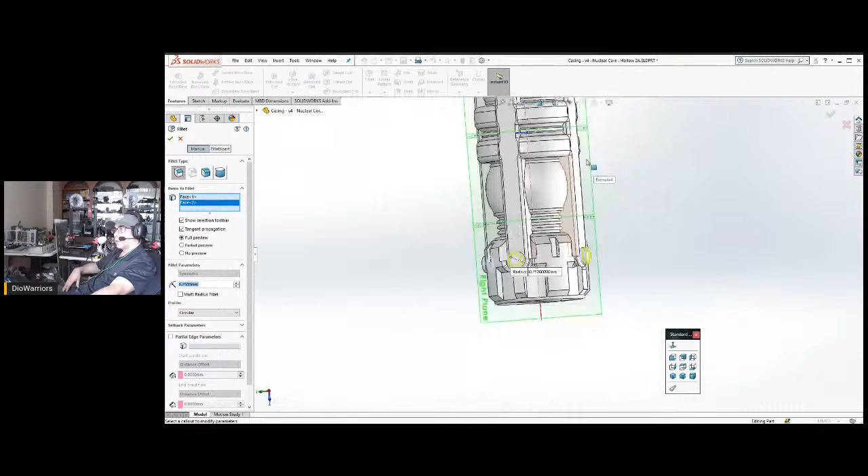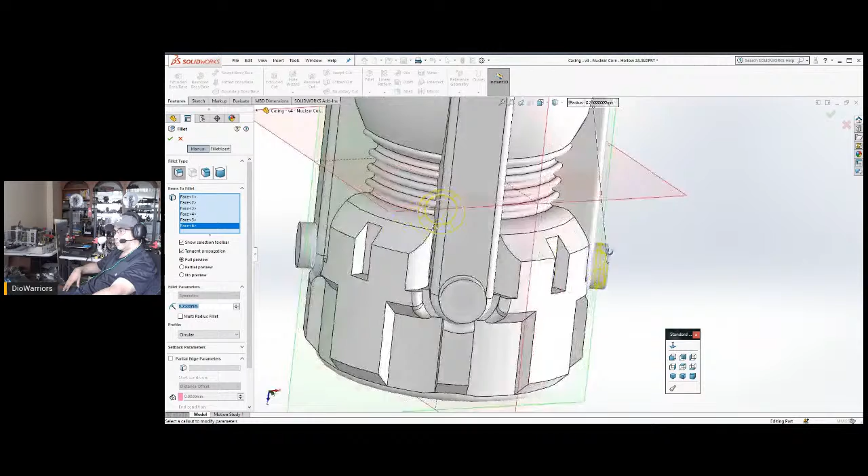Now I'm going to go to fillet. So playing around with 0.75, it's going to look like this. Maybe I should make it to 0.25, so I could do all the sides here. Come on, find the side, okay. There. There. Okay, yeah, let's make this into 0.25, a small little bitty bump.

It won't look too great in terms of the printer because it'll just be a little bump, but it'll be something there instead of the attempted holes and screws. Okay, so I did 4 times.

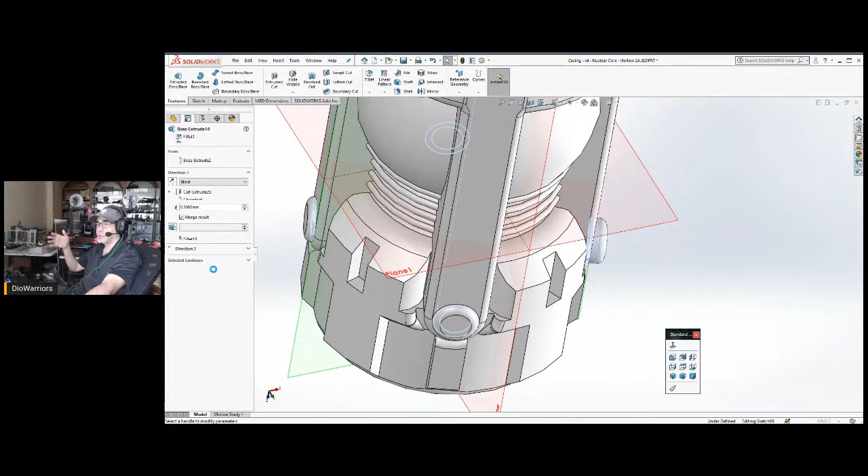Sometimes you can just select everything and move multiple objects, and drag multiple objects away and do things like that. Others you can just select from the tree and then change the numbers and they adjust, and others don't. Sometimes, because of references, things are connected to others and things adjust nicely, and other times, things don't adjust nicely. So that's what I mean by screwing things up, messing around like that.

0.25. And okay, so take a quick eyeball look at this. Go view, hide all types. Okay, so save this. Is it ready for printing? I think we got all the points that we talked about done.

Okay, so this is how the core thing is going to look.

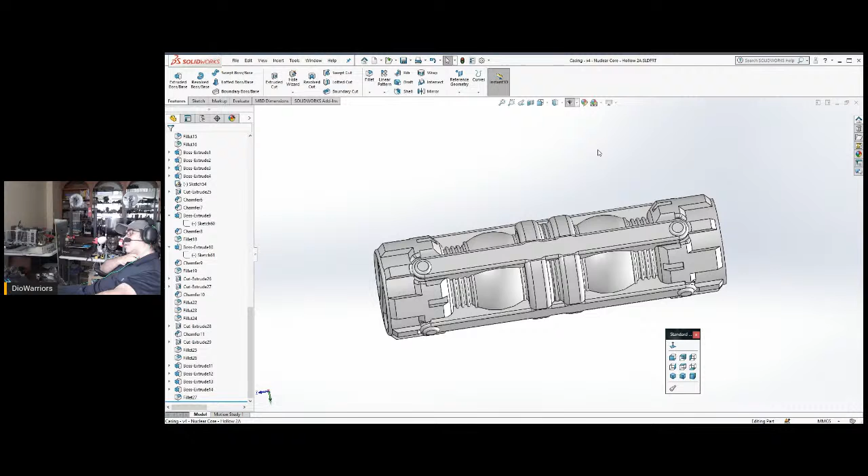I have myself thinking now about some sort of parts that I can use to suspend or to display the core. Thinking of an easy way to do it.

That might be worth another video. Maybe I should start that right after this one. I think I'll do that. If I could get this going, because I have some ideas in mind, as I begin printing this I'll end this video and start the second one. This should be interesting. I've got some ideas in mind.

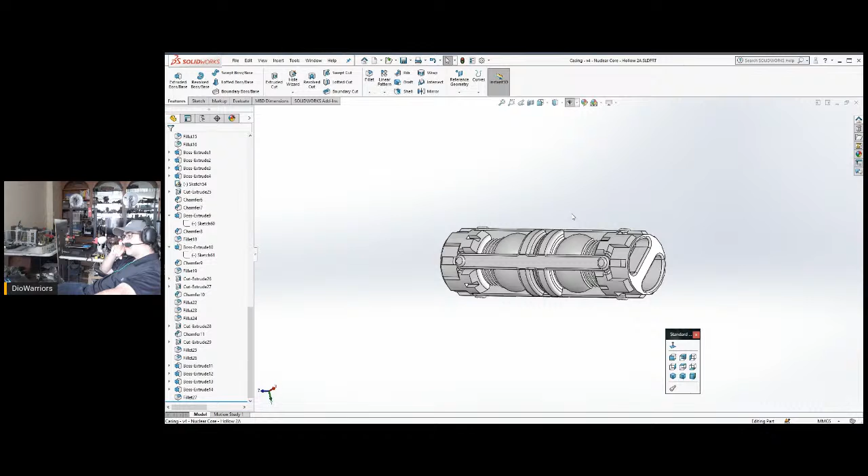Okay, good. So I think I'm going to make these... well, I guess I have the prototype cores here. We'll see how this comes along.

Okay, let's see, so everything is saved. I go Files, Save As. Again, let me capture the path, because I cut and paste other things inside the design, so I no longer have the original path that I copied at the beginning of the video.

Let's go to STL, let's make this into an STL. I'm going to save, yes.

I'm going to go ahead and just leave this up. Now what I'm going to do, off screen, is load up Cura and load up File Explorer and enter in the path, paste. By the time Cura comes up, I'll be able to just drag and drop the STL to it, orient the thing so it stands vertically, make sure it has a raft, and send that to the micro SD card.